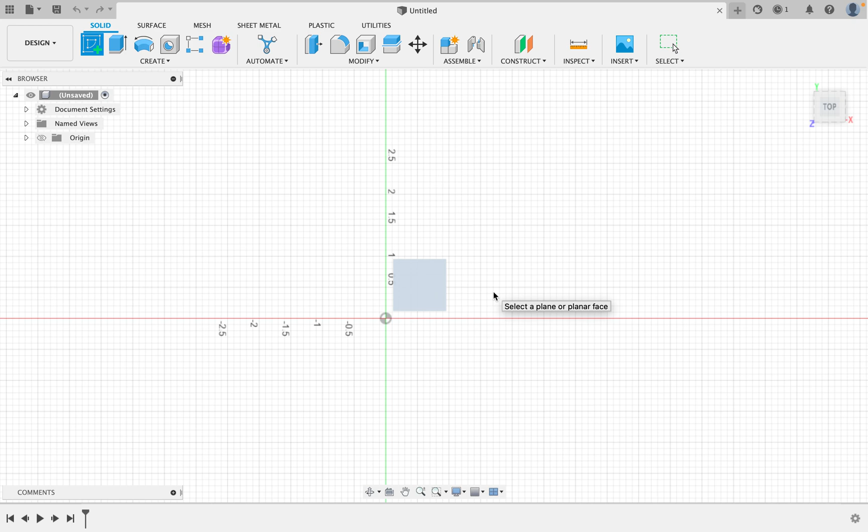So within Fusion, you can do a couple different things. I'm going to show you two different ways to process files. One would be a 3D model, that's your most common, and the other would be a 2D file, like an Illustrator file. So I'm going to just quickly make a 3D model. Let's make a cylinder that's like a 2.8 inch cylinder. I'm going to add a hole in it, and that'll give us some interesting stuff to work with.

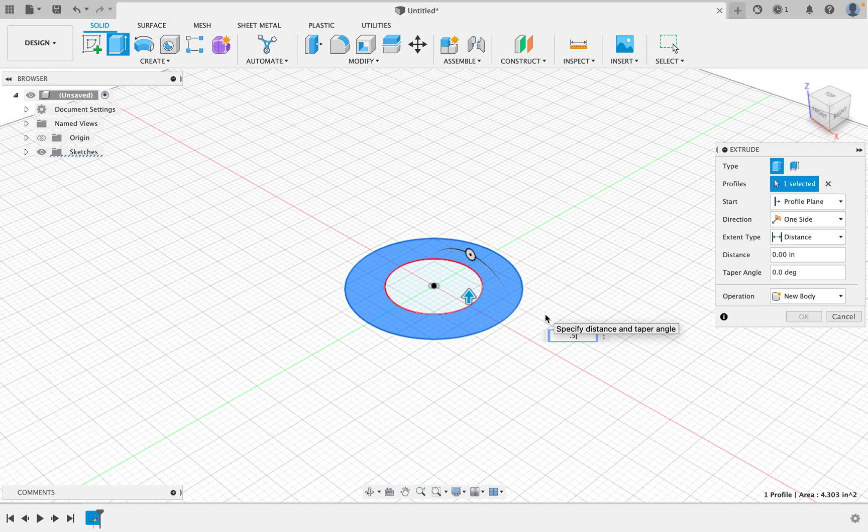I'm going to extrude that, and let's say this is going to be in 1/2 inch material. So I've made my file. I'm going to switch from design mode, and if someone gives you an STL or another 3D model from like Tinkercad, you can always bring it in here that way. So we're going to go down to manufacture, and then within manufacture we need to do a couple of things. One thing is we need to set up our file.

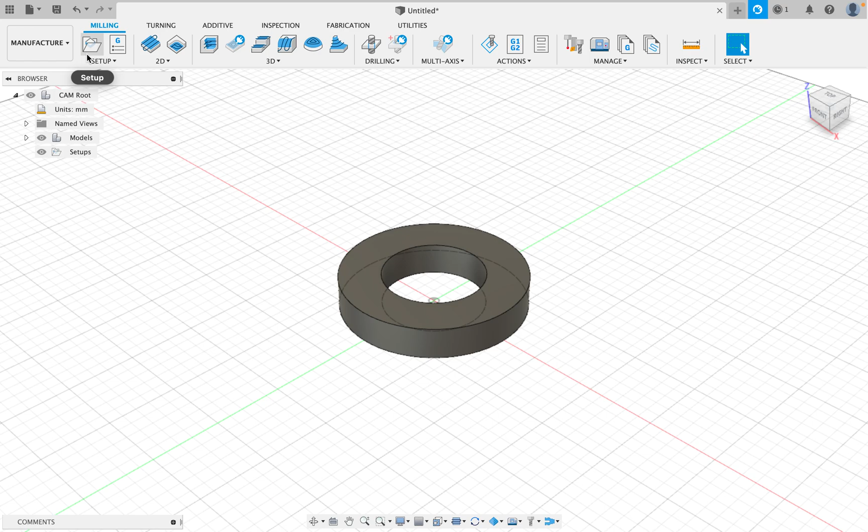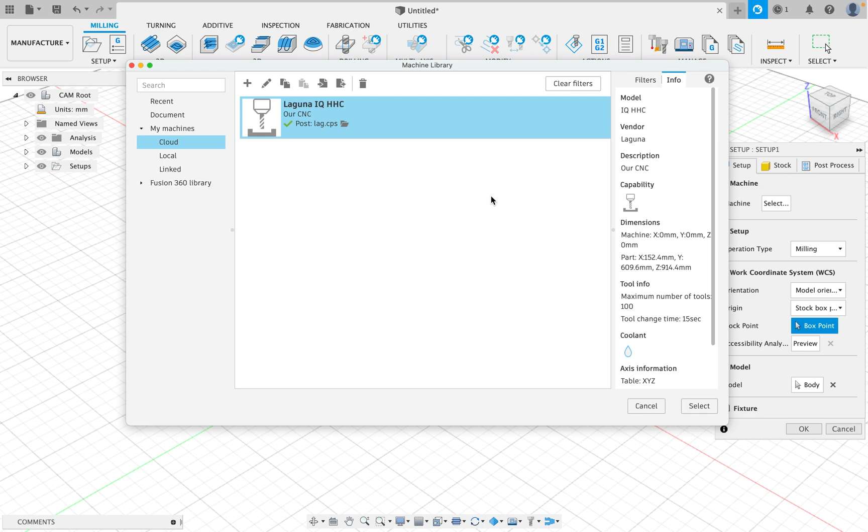So we hit setup. Within this, it's going to ask us to select our machine. Our machine is going to be our Laguna IQ, and I have this set up so that it works perfectly with ours. Again, I'll just give you this file and you can import it, but I also have them saved to the cloud, so if you're in our team, you should have this. So you just hit select. It selected our machine. This is a milling type operation, and then we need to pick our working coordinate system.

Right now our working coordinate system is from the center of our box. Some people work from the corner, but this is just saying, where am I origining or homing the CNC. So I'm going to CNC the tool head in the center of my material. I like to do it that way. Again, some people like to do it in the corners, but I like to do it in the center. And then the model that we're going to CNC should already be selected by default, but if not, you can pick it here.

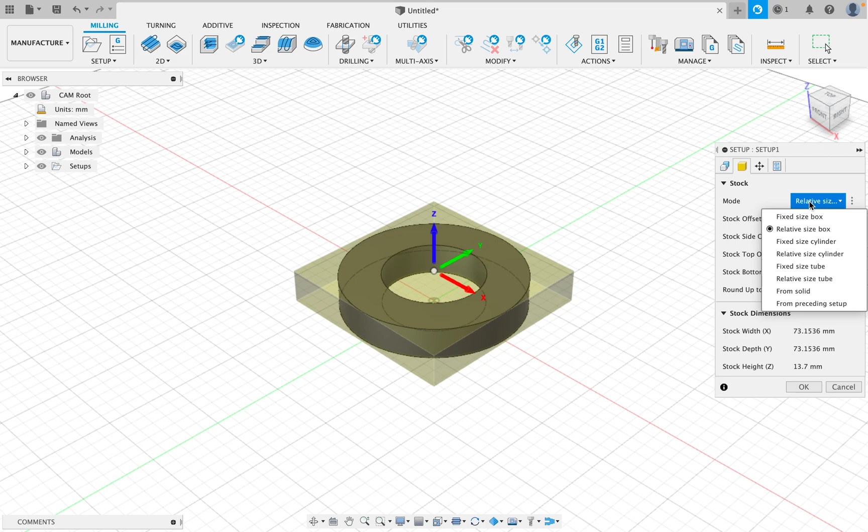So the next tab is stock. Stock is the material we're cutting away. By default, Fusion uses a relative stock size, meaning it takes the size of your model and then just sort of expands it a little bit. We could also use a fixed box size, and we can say, okay, the width of our box is this by this by this, and actually type all that info in. So if we wanted to type in our material size, we could here, or just leave it relative. It's up to you. The important thing here is definitely the height of your material and your model position.

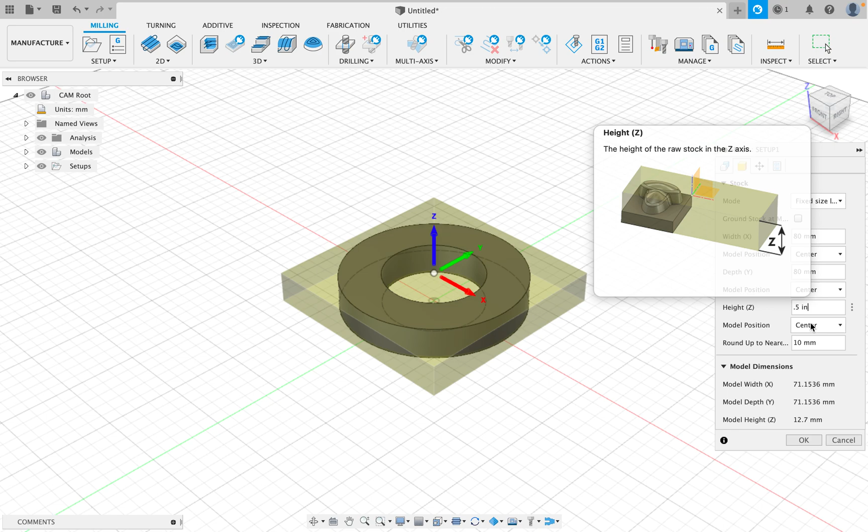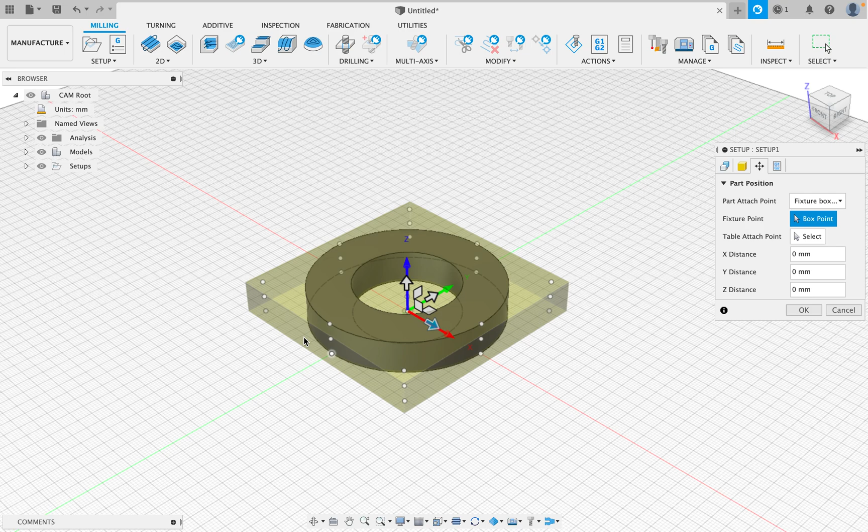So let's say the height of our material is 1/2 inch. And it converts units automatically for you. And we're going to make sure we go to offset from bottom and just double check on your side views that it looks correct and that it's sitting within your material. Okay. You can move your part around if you set your stock size to be, let's say, a 24x36 sheet and you build your stock that big, you could then move it and position it within that.

And then the last one is the post process. So we need to give it a file name. I'm going to call it circle. You don't have to worry with any of this, and just hit OK. So that's our setup. Our machine's ready to go. Now what we're going to do is pick our different methods, and it's these 2D or 3D methods of cutting.

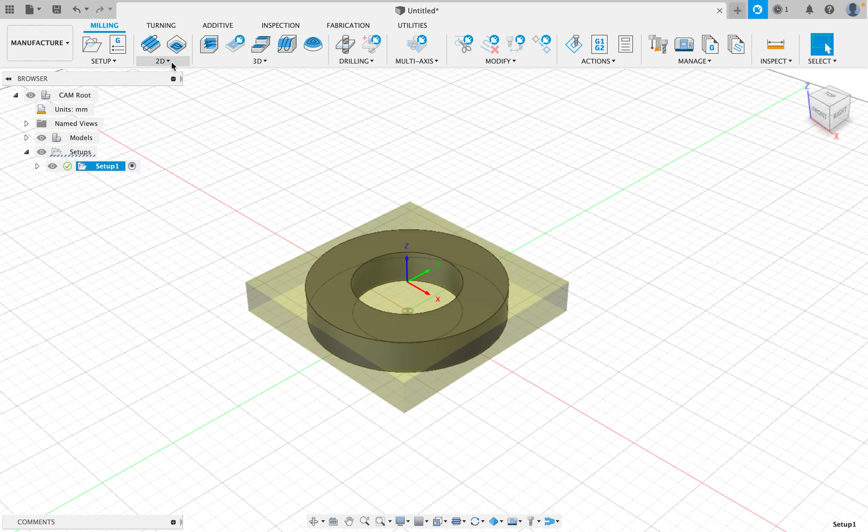So within our 2D, we have a bunch of different options. Most of the time you're going to be using contour and pocket. That's like the vast majority of your cases. Contour is going to cut things out, so it'll cut out my outside edge, and I'll use pocket to cut out the middle. So let's start with my first operation, which is going to be a pocket, and I'm going to need to select a tool over here.

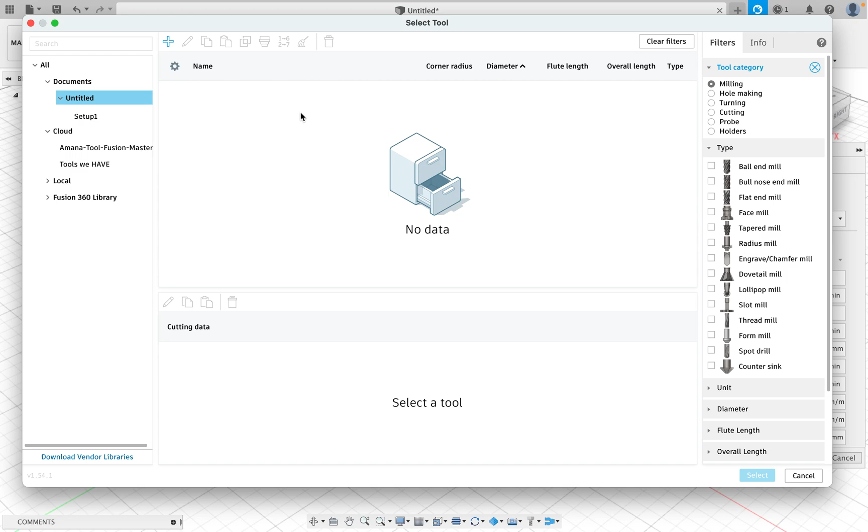So I'm going to hit select, and it brings up my tool database. Here's my Amana tools list. I also have a new file that I've made called Tools we HAVE. So this is like a tapered bit that we have, but within this we can find a bunch of different ones.

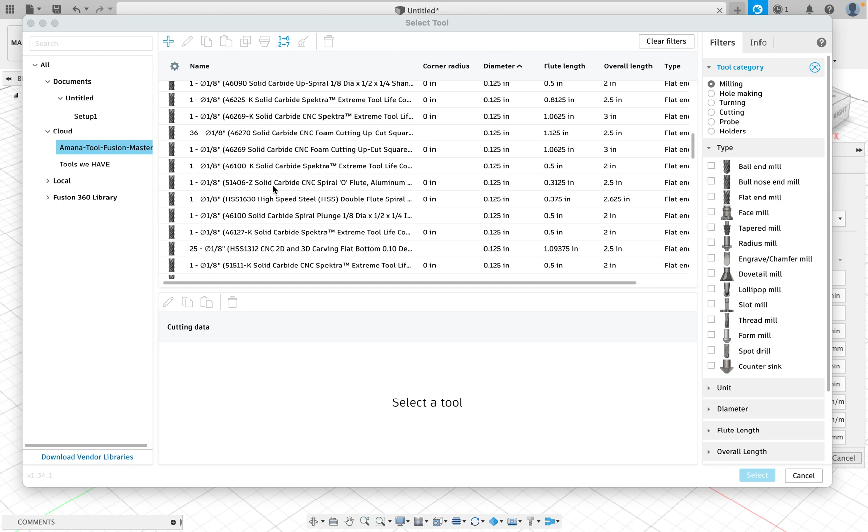So let's say we want to find like a 1/8 inch. Like we have this one for sure. Yeah, 46100-K. We own this. It's an 1/8 inch end mill. So I'll hit select, and you'll see it pop in there. The rest of this can all stay the same. That's why we have the presets.

And then with our geometry, we want to pick our pocket selection. So I'm going to pick this bottom line here. I think you can pick this top line as well, and it's not going to matter, but I'll pick that it's going to cut out. And then there's a little arrow right here. Sometimes you'll see this whenever we're doing 2D stuff. You'll need to click this arrow to change what's being pocketed. It swaps it back and forth.

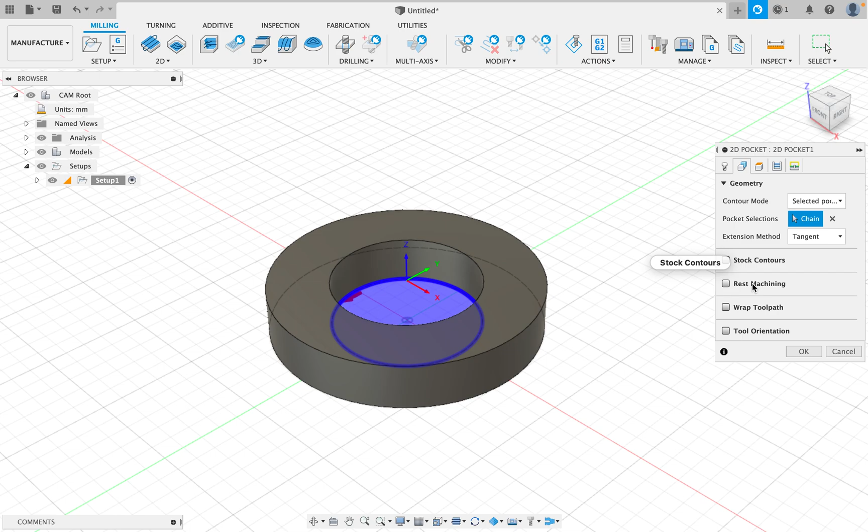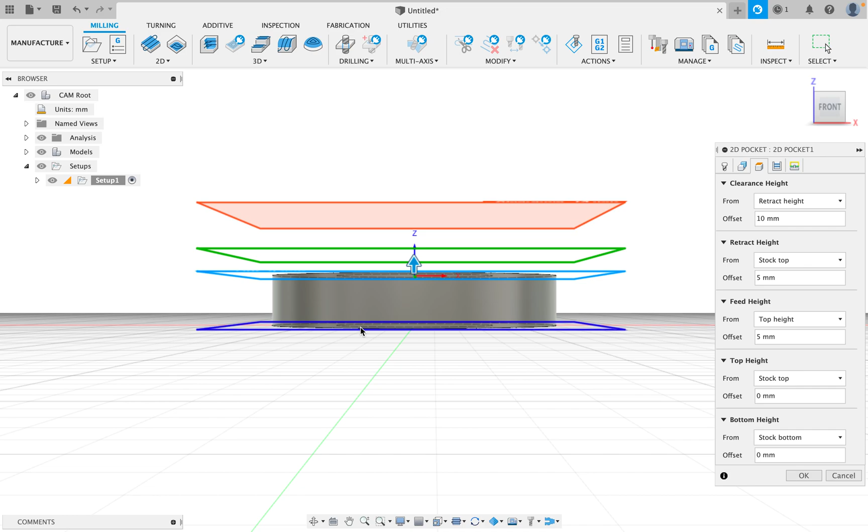So some of the stuff in here, most of this is not going to matter to you. So don't worry about any of that for pockets. And then you have different heights. This part does matter. I usually go to like a front view to kind of see it. But the main thing that you'll notice is that our bottom height is at selected contours. And usually you want to pocket things out entirely. So instead I'll say the stock bottom. And it adds that line right there to the very bottom of my model. So that's like how deep am I going to cut.

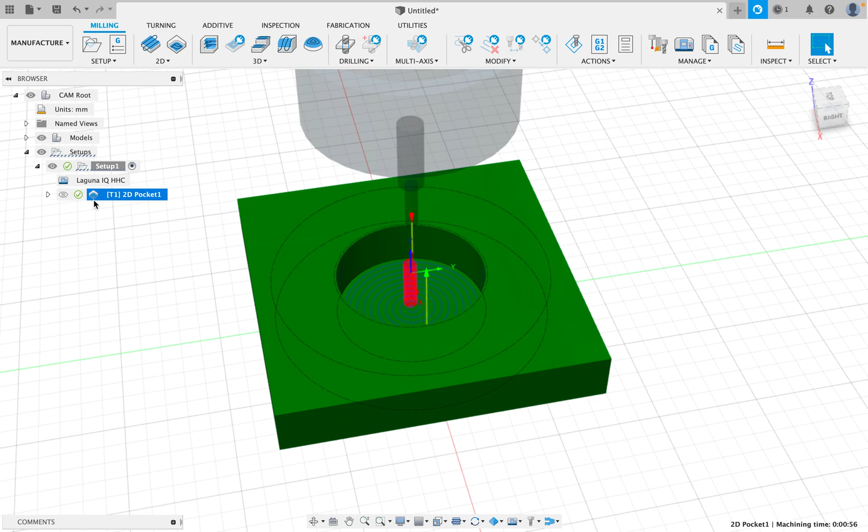And then I actually usually offset it by like negative 0.05 millimeters, something like that. And then I hit OK, and now it's pocketed, and it does not look correct. So we can always go back in and change this by just double clicking it. I think it's this next tab under passes.

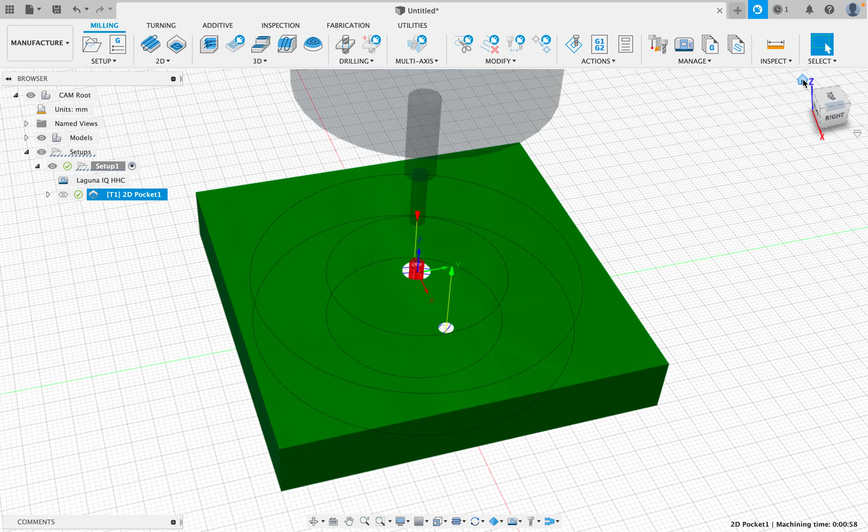Yeah. So under passes, this is like how many passes do I do whenever I'm cutting, meaning how many depths. And this stock to leave is checked, meaning it's going to leave extra stock. If I uncheck that, we should be good now. I should cut all the way down. Yep, so let's hit OK and see what happens. Okay, that looks much better, but it's doing something really funky.

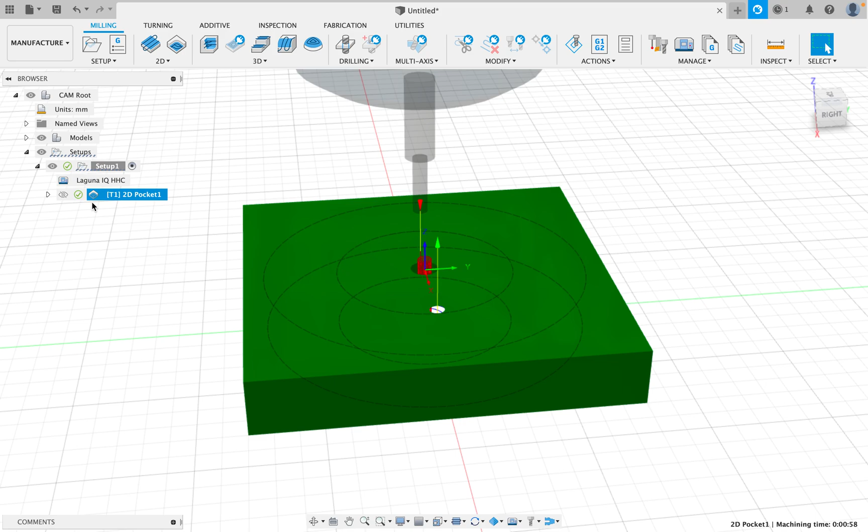Let's simulate it and hit play. Okay, it worked just fine. I think it's just maybe my rendering is a little funky or something. Oh, you know what? It might be the depth of this tool. Let me pick a different tool real quick, because that's an 1/8 inch. So let me find a 1/2 inch tool or a 1/4 inch.

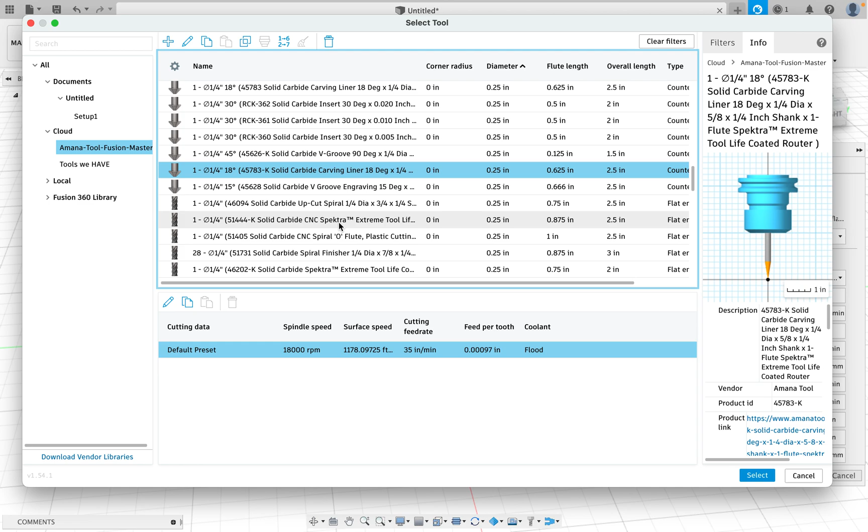So I'll do this, an end mill. There you go. Okay. I'll hit OK, and it should recalculate that. And that looks a little bit better.

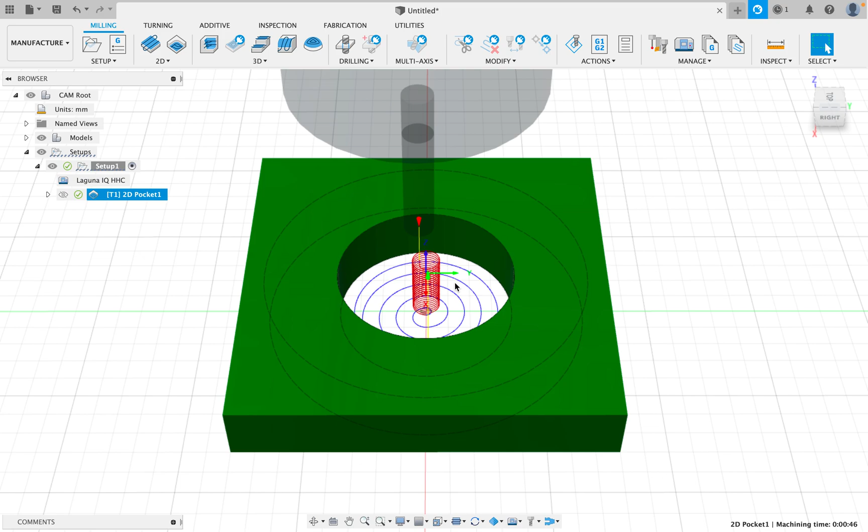Yeah, the issue is that my tool actually wasn't tall enough to cut that in one pass, and I was trying to have it do it in one pass. Again, you shouldn't have to worry about that if you're using the right tool and you understand how this machine works. You should be fine. So it's pocketed that out. This operation says it's valid. So let's go ahead and now do our next cut, which is going to be a contour.

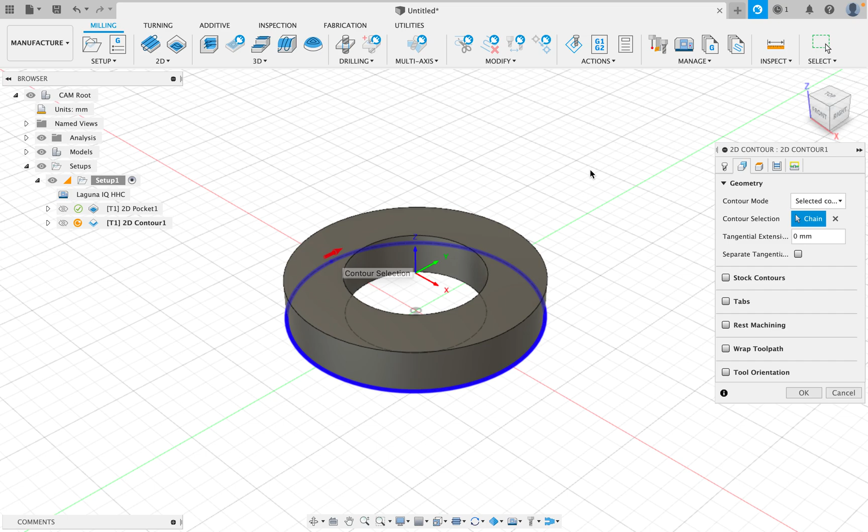So I'm going to go here and go to 2D contour, and it wants my tool. I'm keeping the same tool, and right now it's actually having me select the contour it wants to cut. So I'm going to just pick this bottom outside one. And again, you can see there's this arrow. This arrow is saying what side am I cutting on. So it's going to cut on the outside of that line, which is what we want.

So what we're going to do is we're going to also add some tabs, but I'll hit OK and we'll just see what that looks like. So I'll hit OK, and there you go. It cuts it out, so that's good. Let's double click it and get back in here.

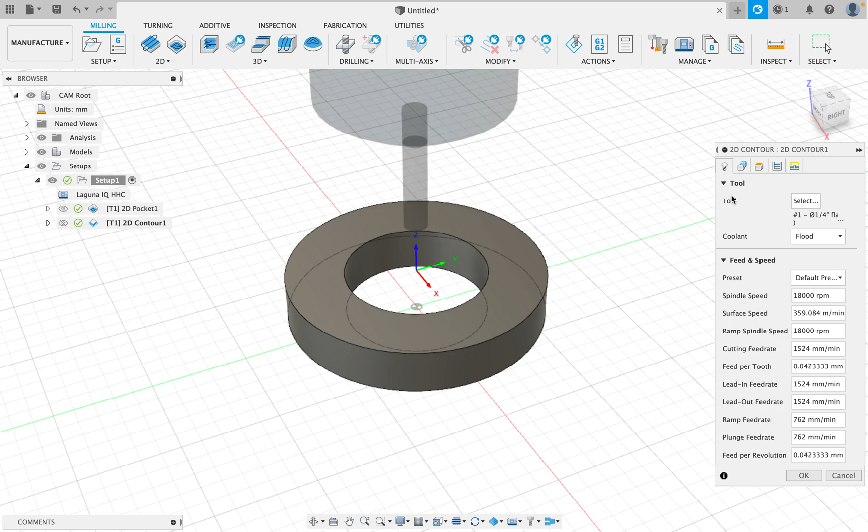So what we want to do is we want to add some tabs. So I can check that box, and it should just automatically add them. If not, you can also change this to at points if you want to click and manually add tabs. Just make sure you pay attention to how tall is your tab, how wide is your tab. I usually like to do tabs at least 1/8 of an inch tall. So I'll switch this to by distance again and let it do its thing automatically.

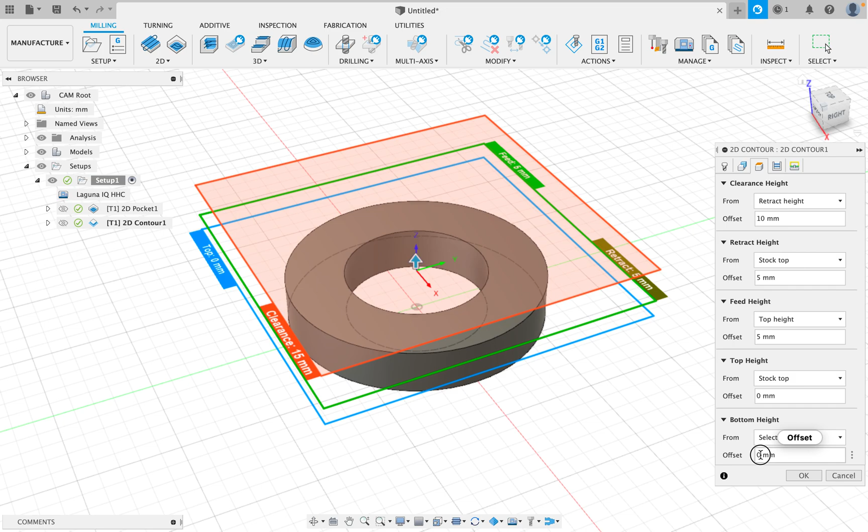And then over here I have different clearances. So my bottom, again, I'm going to do that same thing, I just always do stock bottom if I'm cutting something out, and do minus 0.05.

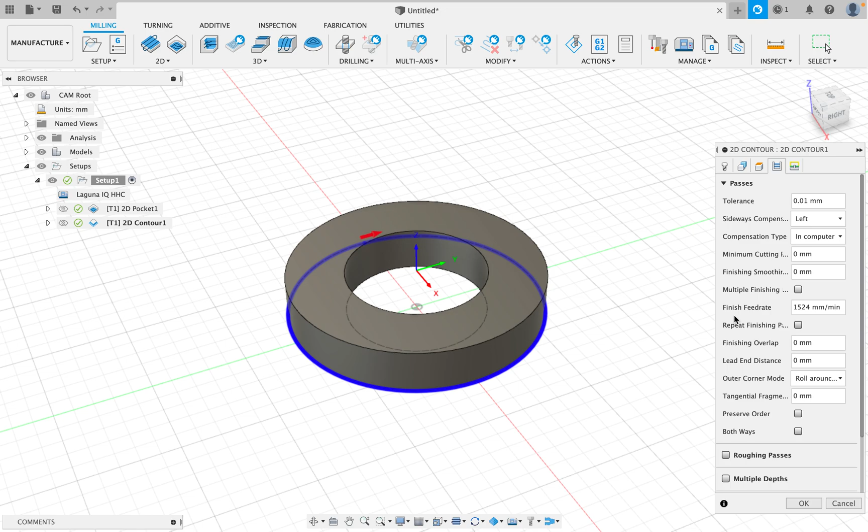And then in this one right now, it's going to try and do all this in one pass, and you really shouldn't cut deeper typically per pass than the width of your tool. Sorry, my cat's yelling. So the width of our tool, the diameter of the end of our end mill, is 1/4 inch. So we really shouldn't have a pass deeper than 1/4 inch. And right now we definitely do because we're cutting 1/2 inch material in one go.

So what I'll do is I'll check this box that says multiple depths. And it's asking what's my maximum roughing step down. So what's my maximum height that I can step down per roughing pass, which is what most cutting passes are. And you could actually just type in, it's kind of cool, tool_diameter, and it will just automatically do that for you.

And then a finishing step down is, so usually it would cut a pass, then go deeper and cut a pass, then go deeper and cut a pass. And then at the end it would do a finishing pass to give you a nice edge. So if you wanted that, you could add that here. I'm not going to bother, but I like to do a tool diameter, and then that's all fine. Yep. All those settings are fine.

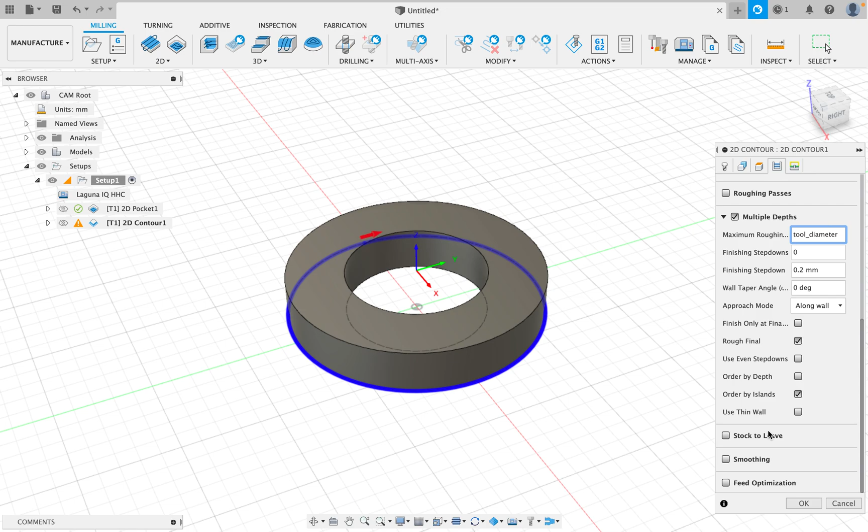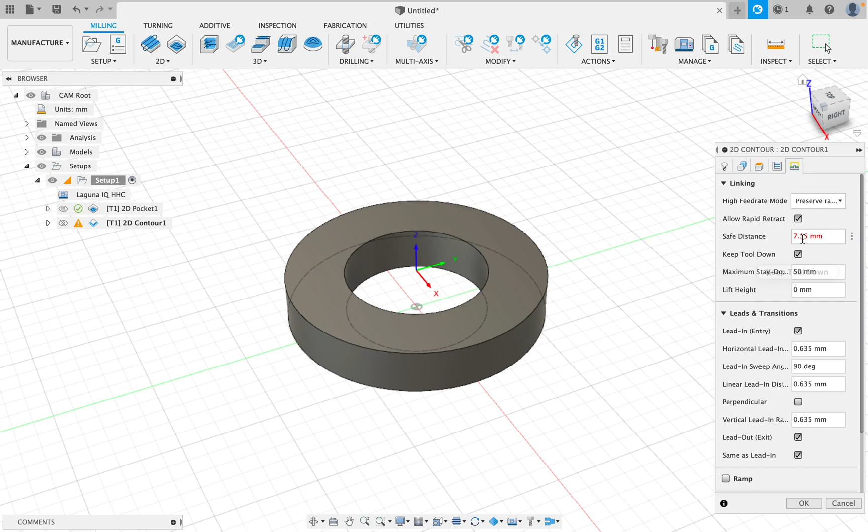I like to also use an option in here that says keep tool down. Let's see if I can find that. Oh, here we go. So it's under linking, and we just say keep tool down. This is going to give us an error, by the way, because of our passes. So we'll hit OK. It's going to say do you want to ignore the warning. You can ignore this warning. It's not a big deal. It'll just give you a little error right there, but that's fine. So now what we have is a multi-pass and multiple depth cut with some tabs.

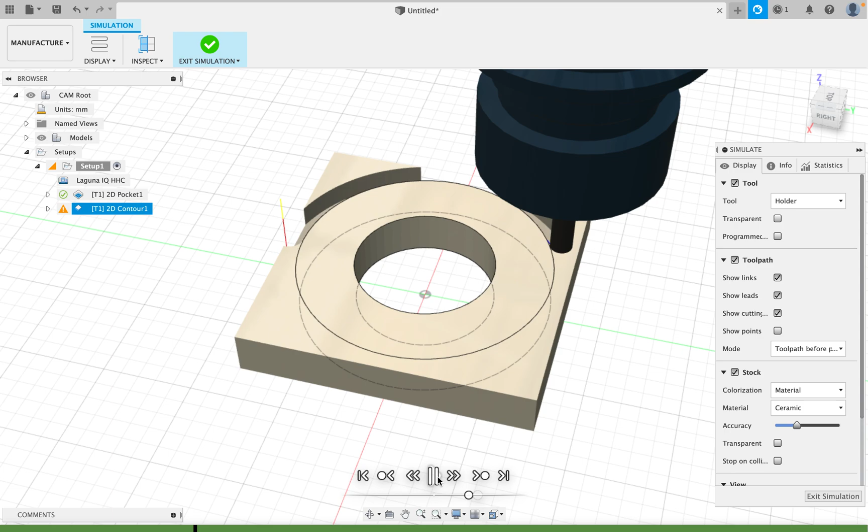So let's hit this simulate button right here. Let's hit play. You can watch it. This is your speed, by the way, if you want to play it back at a slower speed. So it's going to cut once and then go down and cut again. Okay, exit simulation, so that's all good. I'm going to save this file real quick. I'll call it circle.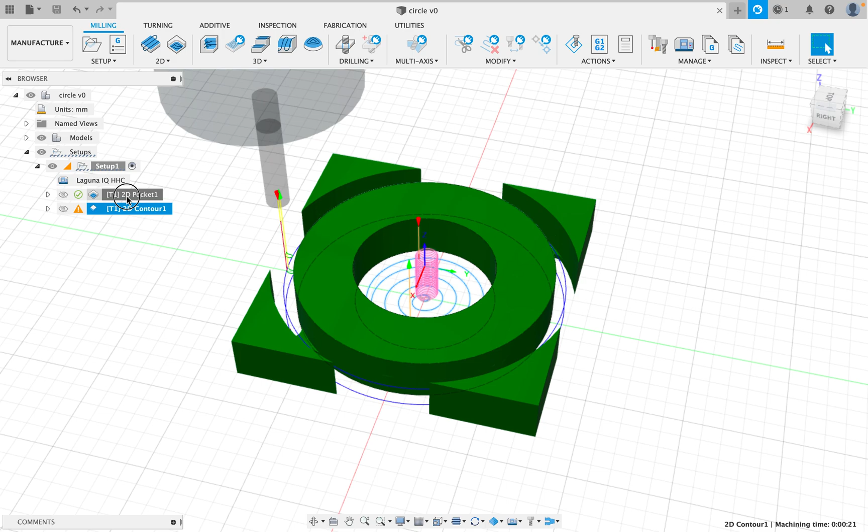And once we're all done with these and we're good to go, what we want to do is click back on our machine right here. This is super important because if you have one of these selected, it'll only export that one. The ordering here also matters. We always want to contour at the very end. So I'm just going to click on this setup, and there's a couple little buttons right here.

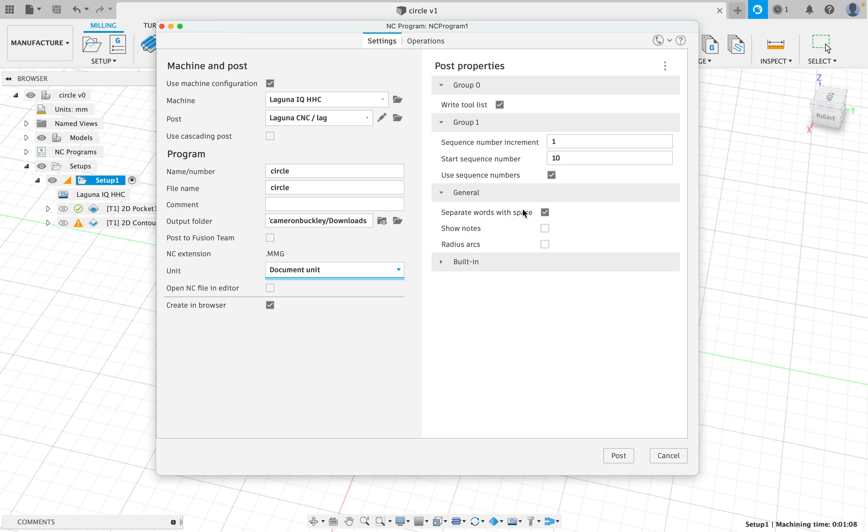One of these is post process, so I click that. It opens this up. It says what machine you're using, what post, which should be the post file that you got from Laguna, and then the name, and then where do we want to save it. And then I always leave this as document unit, and then we just hit post, and that should generate some code. So now you have in your downloads that file, and that MMG file is what you would then put on your flash drive to then put on your CNC and run.

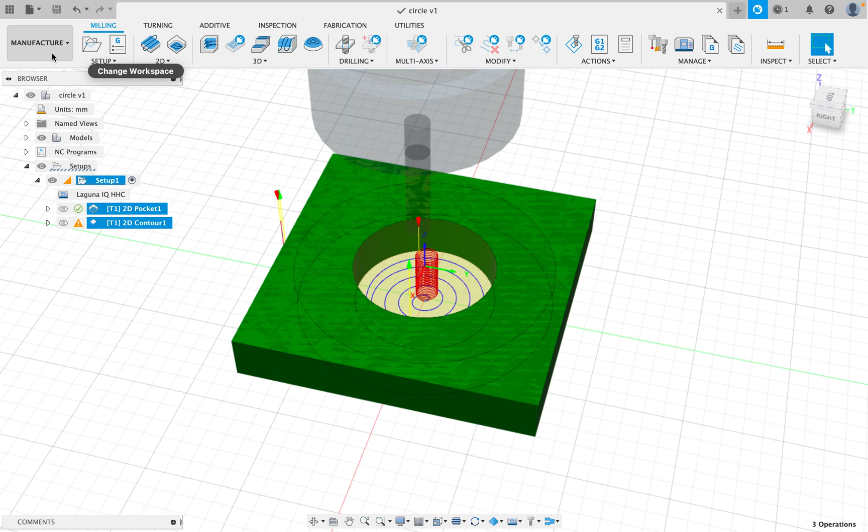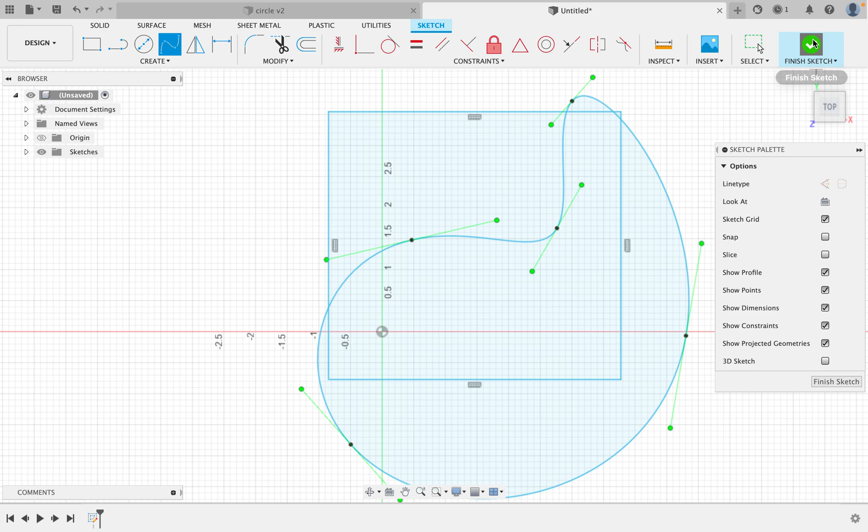Okay, so let's do the same thing. Let's make a new design, and this time we're going to do a 2D design. So this is pretty common where you might have a shape and some sort of line. Here we'll do a funky contour. And we want to cut this shape out. In fact, actually in our sketch, let's just trim this down.

Whoops. Trimmed a little too much there.

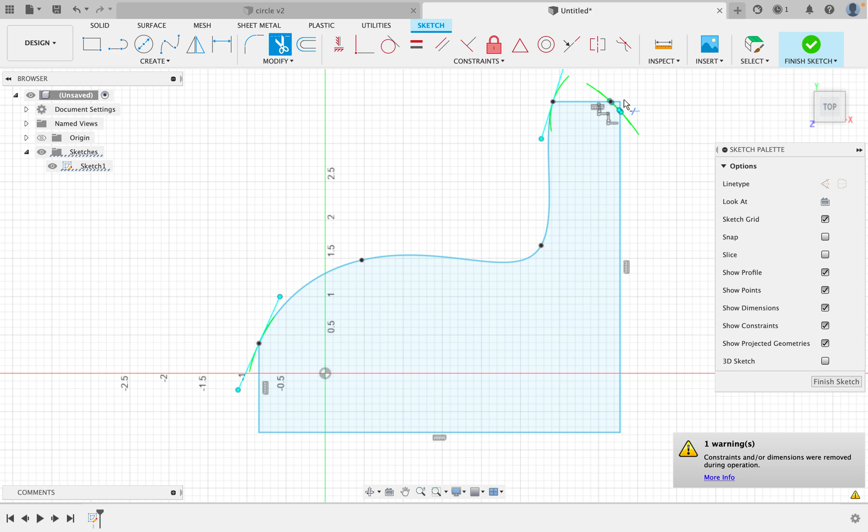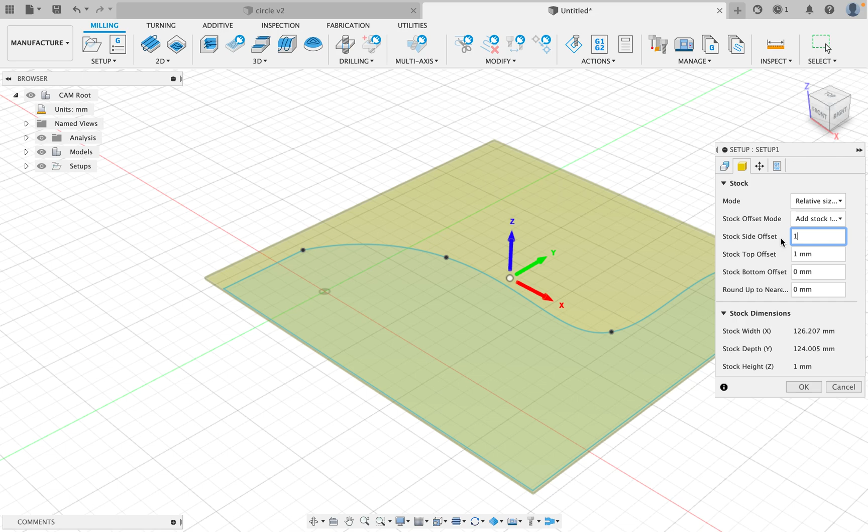Okay, so let's say this is the sketch that we want to cut. If you have an SVG, you can do this same process: go to Manufacture, then within Manufacture go to Setup. Select our machine, so our Laguna. Our stock point's fine. Let's do a relative stock side, and I'm going to do like a 10 millimeter on all sides and a 0 on the top.

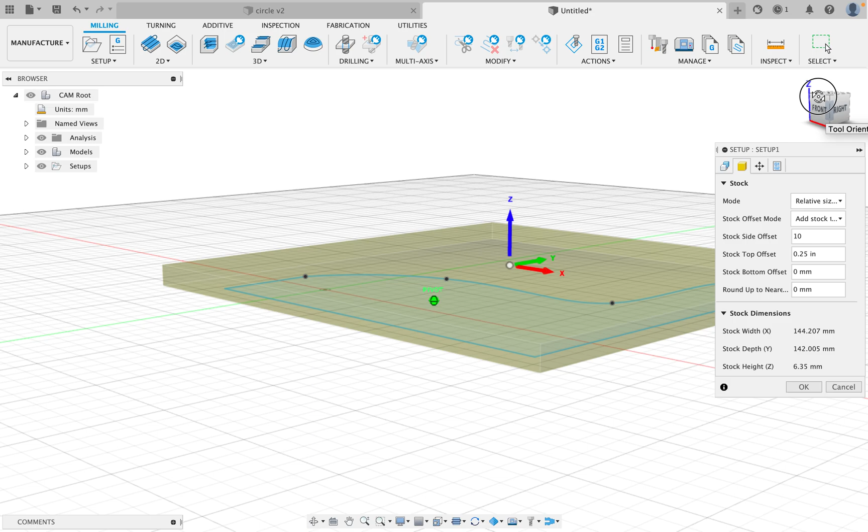We're going to say 0 on the top, but what happens when we do that is it's paper thin because this doesn't have any dimensionality, so we need to tell it how tall it should be. Let's say in this case we're going to do 1/2 inch, or let's do 1/4 inch this time. So 1/4 inch, okay, and it auto converts it, and now I have my stock. Now this top offset, or if you're not doing a relative side, just your height, should really be something you caliper and measure that way—it shouldn't be a whole number like this. So I'll give it a name, final program, I'll call it swirl, hit OK.

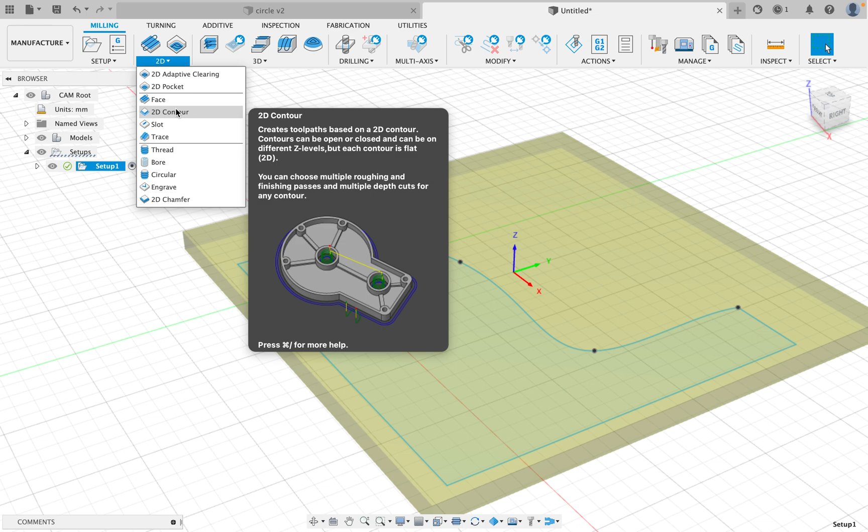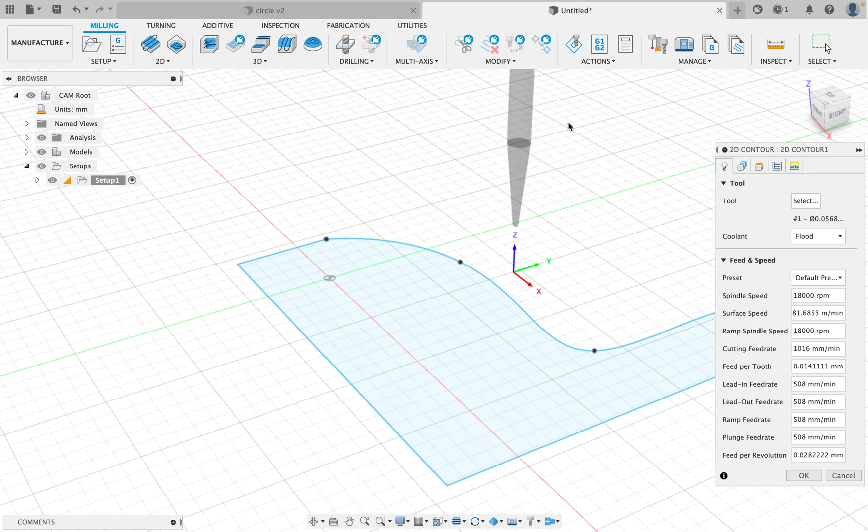So this one we're going to just do a simple contour. I'm going to do a 2D contour, pick my line, and pick my tool. Let's do something funky like this tapered bit. All bits, by the way, have a little identifier on the side, so you can always look at what we have and use that. And then we've selected this.

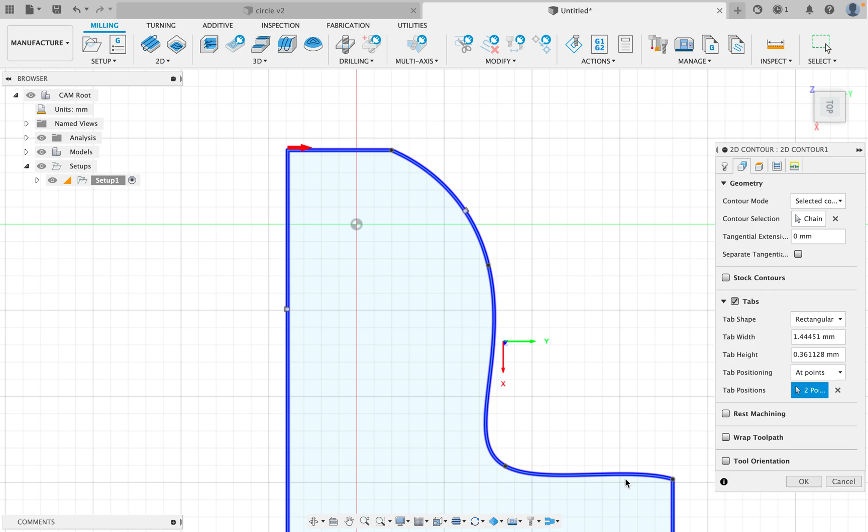Now what you'll notice is this little arrow is really important. If I click it, that's cutting on the outside of the line, this is cutting on the inside of the line. We want to cut on the outside in this case. We're going to add some tabs—that's a lot of tabs, so I'll do far less and instead do at points and just pick 1, 2, 3, 4.

And we got to get our height set up correctly. So let's say from the bottom—I always just do stock bottom, but you can leave it how it is—and we'll offset it -0.05. And we're going to do multiple depths, just like we did before.

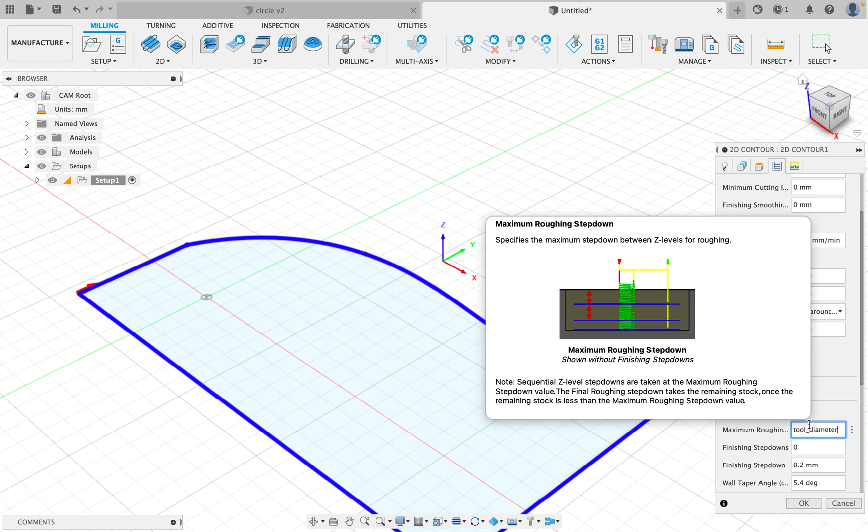And we'll do tool diameter. This is weird though, because of how this tool is. Let's see what it does when I hit OK—I think it's going to give us a ton of passes. Also make sure stock to leave is not checked. Okay cool, and for linking we'll do keep tool down. All right, let's hit OK.

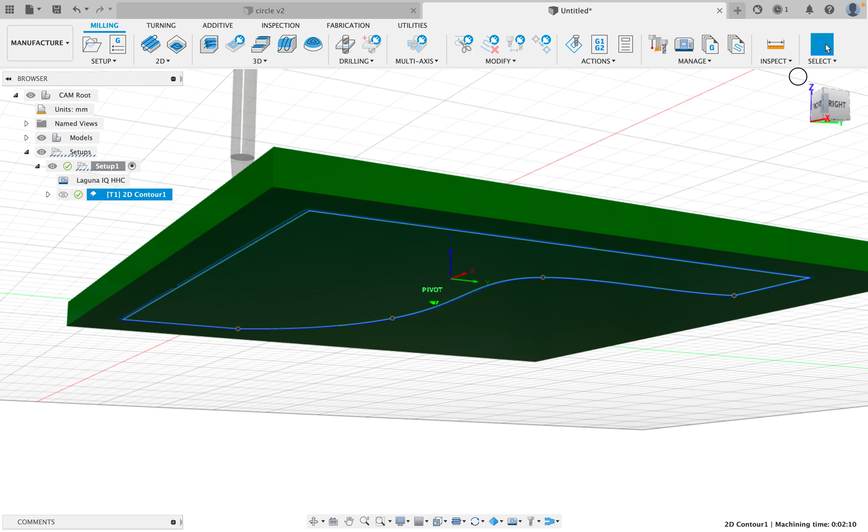So that's not bad, it just gives us a lot of passes. It's actually not bad at all, we'll just leave that, but you could probably cut more. Because this is tapered, it's just taking the diameter of the final taper. I think tapered bits you can actually go a little higher than that, but that's okay.

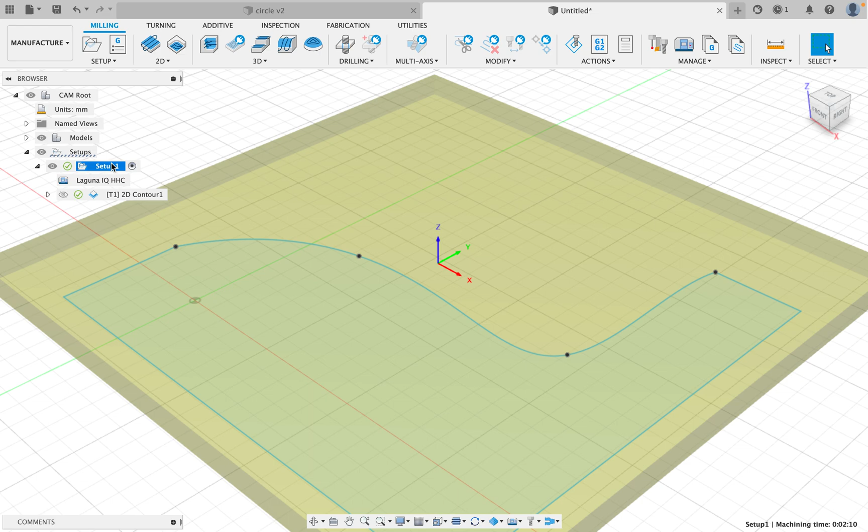So we're going to look at the top view. Does that look good? Yep, it's got the little bits that are the tabs. And we're going to export it by clicking back on our setup and hitting post process and saying post.

So that's the basic process. Some of this 3D stuff I'm not going to get into, but really 99% of the time you're using pockets and contours, and that's it.

You can look through some of these other ones and figure out exactly what they are, but they're much more advanced. Once you add ramps and things like that, it just becomes a whole other thing. I'm sure you guys can figure it out, but that'll just be something to do maybe at a future date once you get this kind of down.

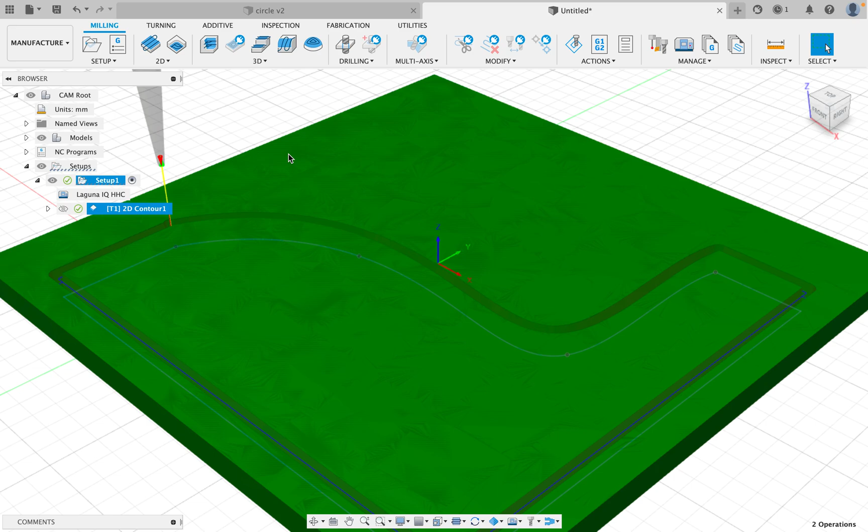So that's the whole process. Once you're done here, you're going to take your MMG file, the file we just exported, drop it into a flash drive, plug that flash drive into our CNC, and then we got to do the actual mechanical stuff on the CNC.